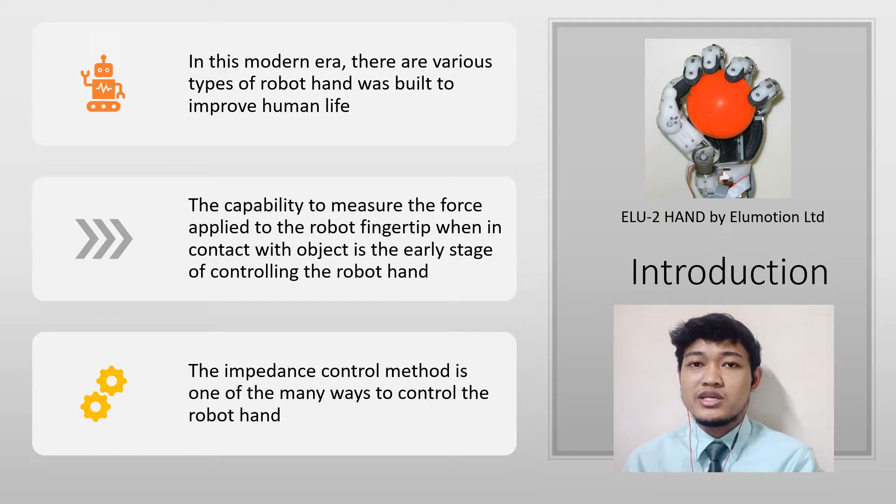Impedance control is a dynamic control approach related to force and position. It is often used in applications where the manipulator interacts with the environment, such as a robot hand, and where the relationship of force and position is concerned.

The robot hand consists of one palm and 3 fingers. It is made up of 7 degrees of freedom, whereby each joint represents 1 degree of freedom. Each joint of the finger is driven by a DC micromotor equipped with encoders. The encoders are attached to the motor to measure the rotation of the motor for position control of the robot hand joint. 6-axis force sensors were located at the fingertips of the hand for force measurement in the X, Y and Z directions.

The system architecture uses multiple PCI interfaces, which are the PCI NI 6225 and PCI Advantech. The function of these multiple PCIs is to establish the interface between the hardware and software. The analog input block of Real-Time Windows Target in Simulink on the host computer receives analog input from the force sensor. The digital input block receives the signal from the encoders, and the motor driver receives an analog signal from Simulink, both via PCI Advantech.

The position-based impedance control was developed by considering the translational impedance equation to enforce an equivalent mass-spring-dashpot behavior for the position displacement when the end effector exerts a force on the environment. From the block diagram, the impedance control starts by setting the force reference Fref to its desired value. When the robot fingertip is in contact, it will produce an external force. This external force is only taken from finger 1, because finger 1 is the main finger that controls the other fingers, as there is a short circuit between these fingers. Only the external force from finger 1 will be used in the impedance control system.

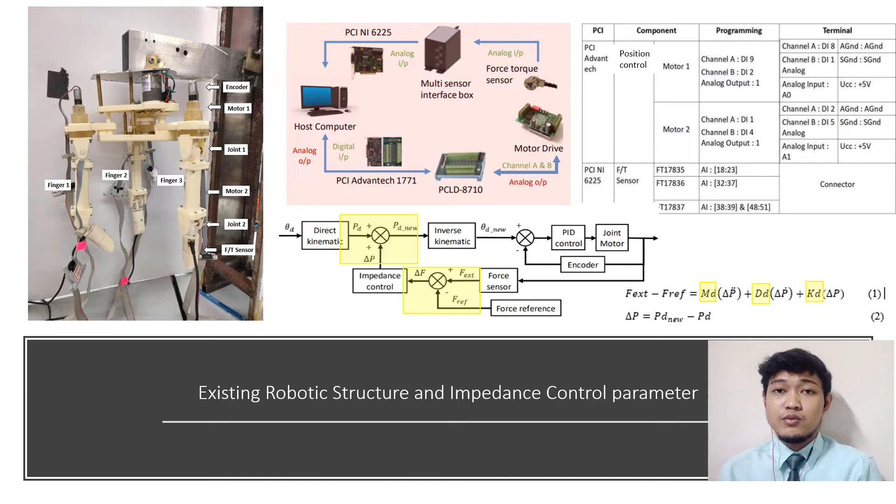When the external force exceeds the force reference, the position-based impedance control will be activated and it will modify the desired tip position PD to PD new by using impedance equations 1 and 2. MD, DD and KD are the impedance parameters known as mass, damping and stiffness parameters respectively. They can be used to produce the softness of the robot hand by changing the tip position based on the force exerted on the robot fingers. If there is no force interaction at the fingertip, PD will be equal to PD new. In order to implement impedance control, there are 3 impedance control dynamic parameters that need to be varied.

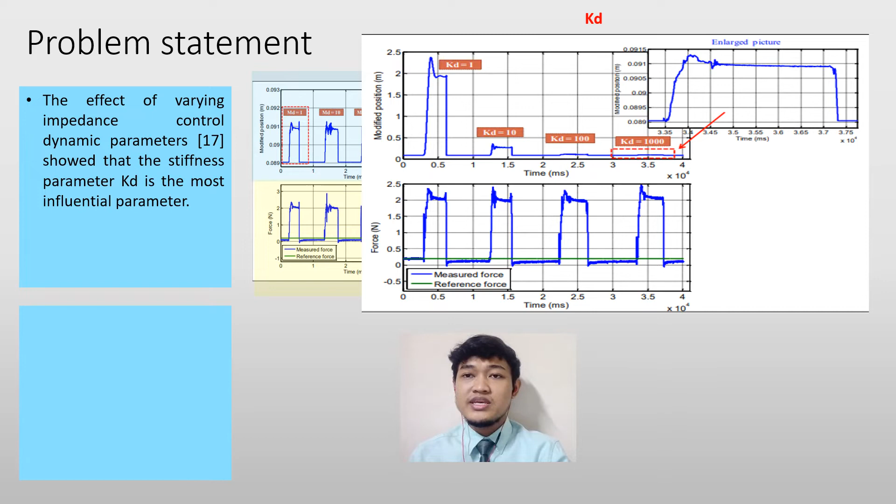From the experiment on the effect of varying impedance control dynamic parameters by Nasi, the graph below shows the force exerted on the fingertip while the graph above shows the modified position of the robot hand. Nasi concluded that MD and DD were set to 1 and 10 respectively, as the graph shows less fluctuation on the modified position. KD has shown to be the most influential parameter: when the external force exceeds the force reference, there is a significant difference in the modified position, and when KD increased by a factor of 10, the modified position becomes smaller. However, the work has not yet been done on real object grasping.

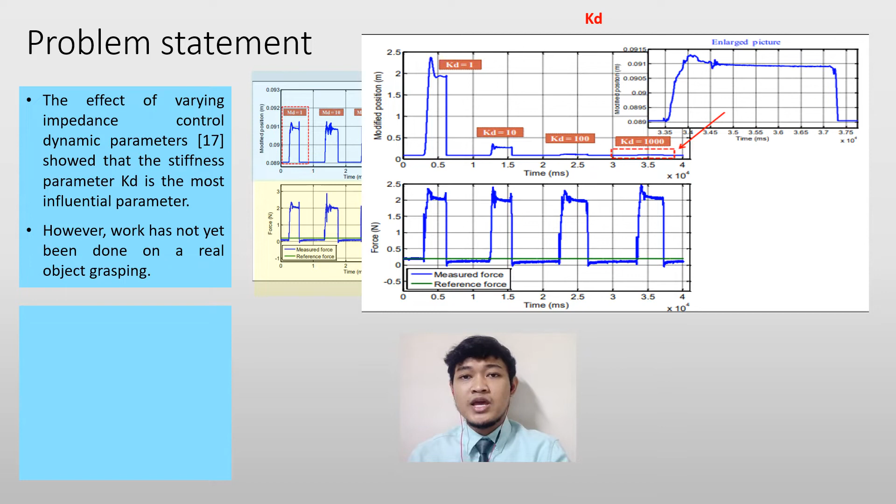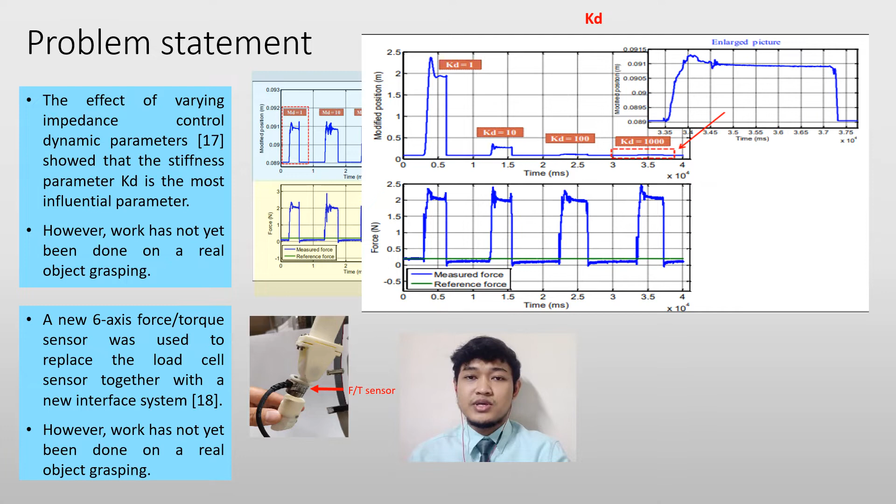In the latest study, a new 6-axis force sensor has been used to replace the load cell sensor, together with a new interface system for more accurate force measurement. However, the work has not yet been done on real object grasping. Therefore, the objective of this work is to analyze the effect of varying the impedance control stiffness parameter KD on object grasping, and the effect of grasping different object textures with the same impedance control stiffness parameter.

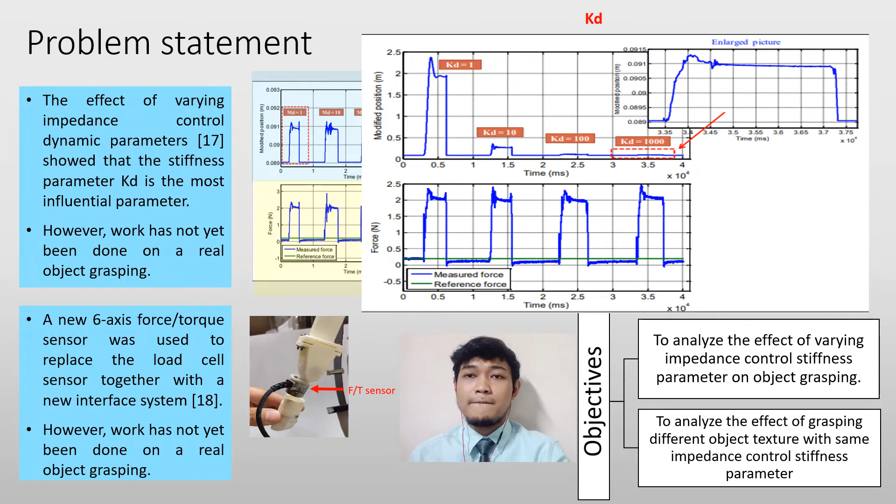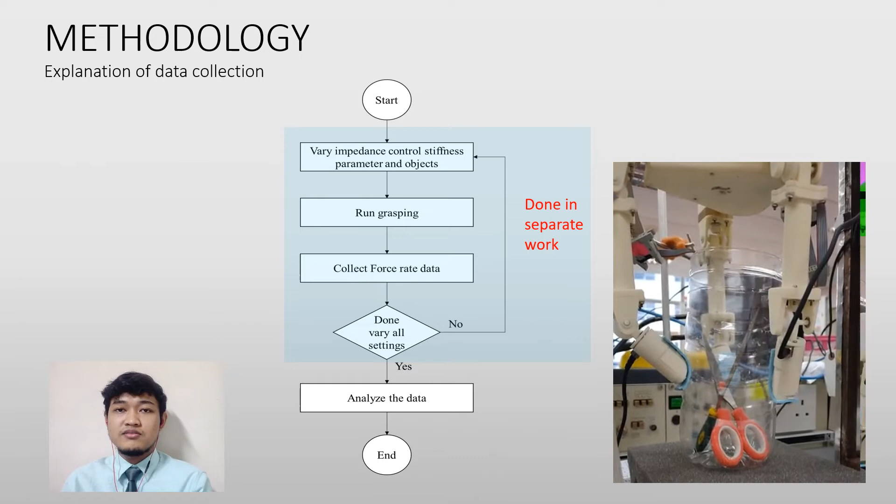This video shows how the grasping data was taken. In separate work, the 3-finger robot hand is tested for real grasping on two objects. The tested objects are a bottle and a ball, which have different textures. The bottle is hard, while the ball is very soft or spongy. It starts by varying the impedance control stiffness parameter for both the ball and the bottle. Firstly, the stiffness parameter is set to KD 1000. The force reference value Fref was set at 0.1 Newton.

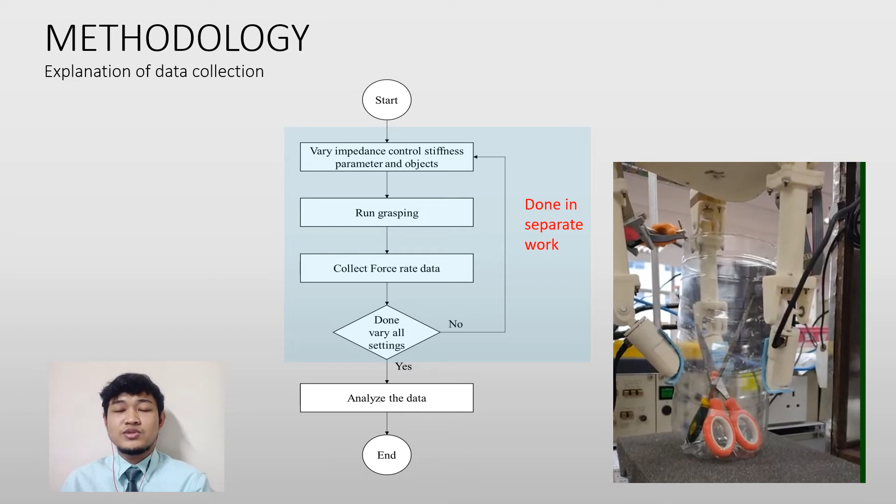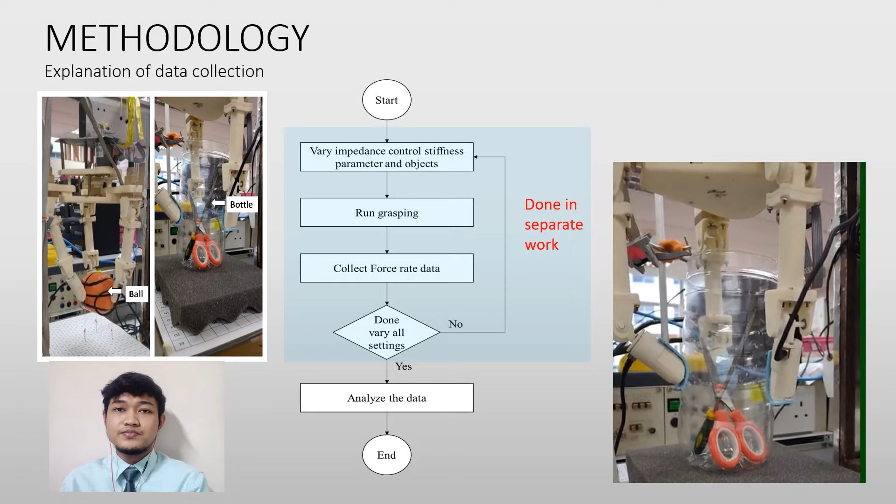The 3-fingered robot hand was tested for grasping a plastic bottle and a sponge ball as shown in the figure. The external force measured by the force torque sensor in figure 1, namely force external 0, is collected at 0.25 seconds after the fingers start to touch the object. When the grasping tightens at 1 second after the first touch, the external force, namely force external 1, is collected.

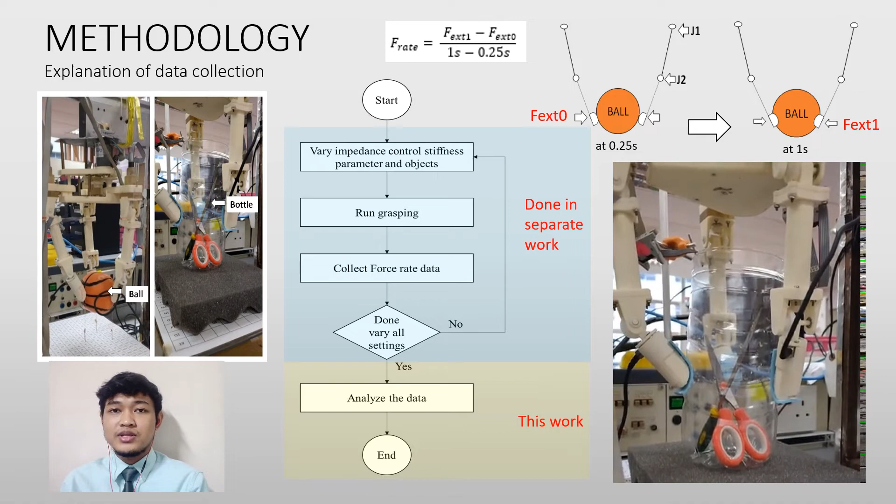Force rate data was taken by using this formula. In other words, force rate shows the intensity of the force applied to the robot fingertip when in contact with the object. The procedure was repeated 25 times for each object. After completion, a similar procedure was taken for other impedance control stiffness parameter values, which are KD 500 and KD 250. In this work, analysis of F-rate data was done to analyze the effect of varying impedance control stiffness parameter on two objects grasping.

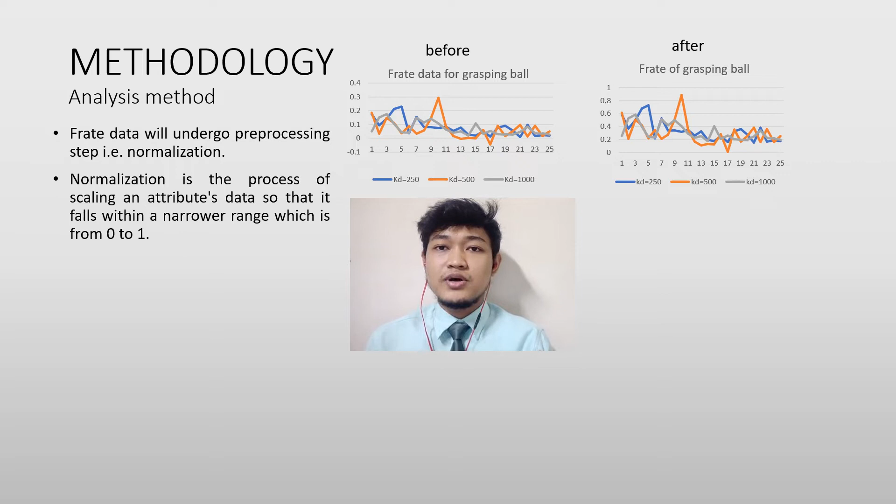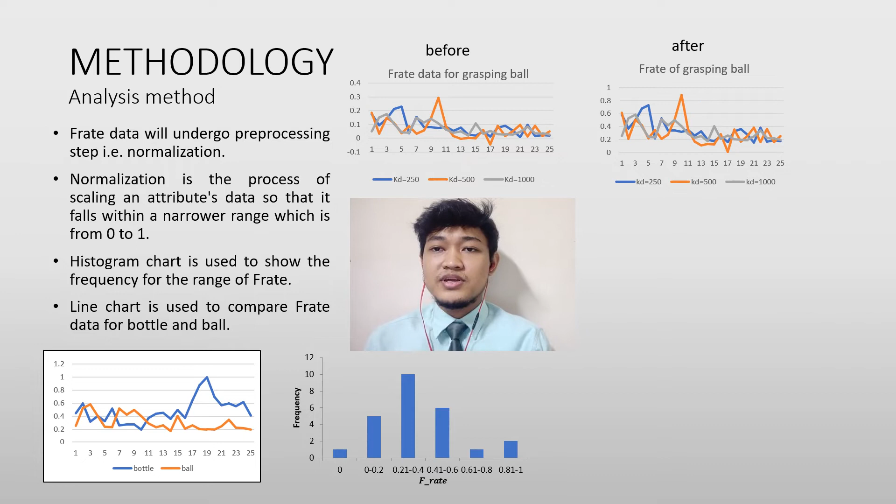The F-rate data will undergo a pre-processing step, that is, normalization. Normalization is the process of scaling attribute data so that it falls within a narrower range, which is from 0 to 1. Figure 1 shows the F-rate before and after normalization. A histogram chart has been used to show the frequency for the range of F-rate. A line chart is used to compare the F-rate data for grasping bottle and ball. All of this was done to look for the effect of varying KD on F-rate and the range of F-rate for bottle and ball.

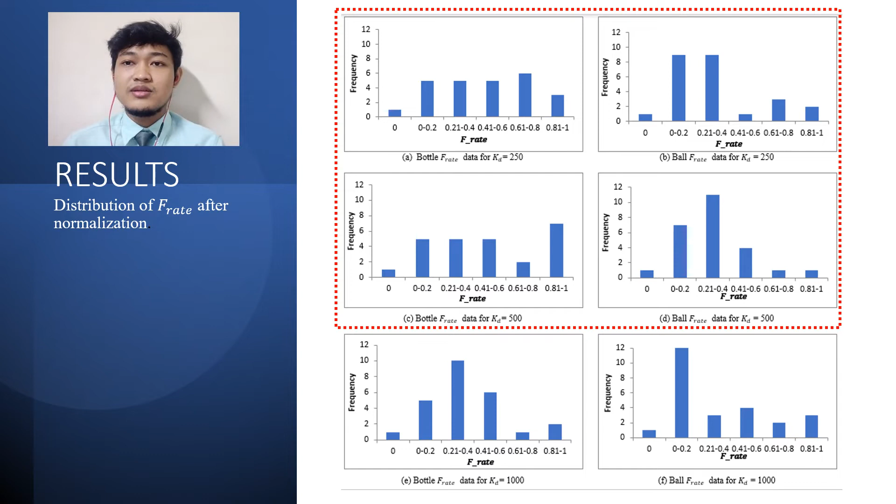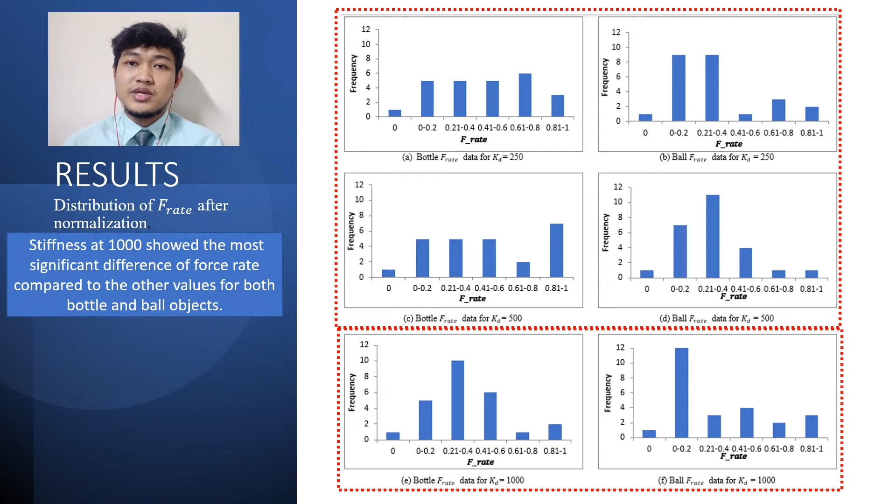This graph shows the distribution of F-rate after normalization. From the analysis, there is no pattern of data that can be seen from figure A, B, C, and D. However, the stiffness at 1000 has shown the most significant difference of force rate for both object grasping. Besides, at the same stiffness, the force rate data are most frequent in the range of 0 to 0.2 for ball, compared to 0.2 to 0.4 for bottle. Thus, it can be concluded that the grasping force rate for bottle is higher than a ball.

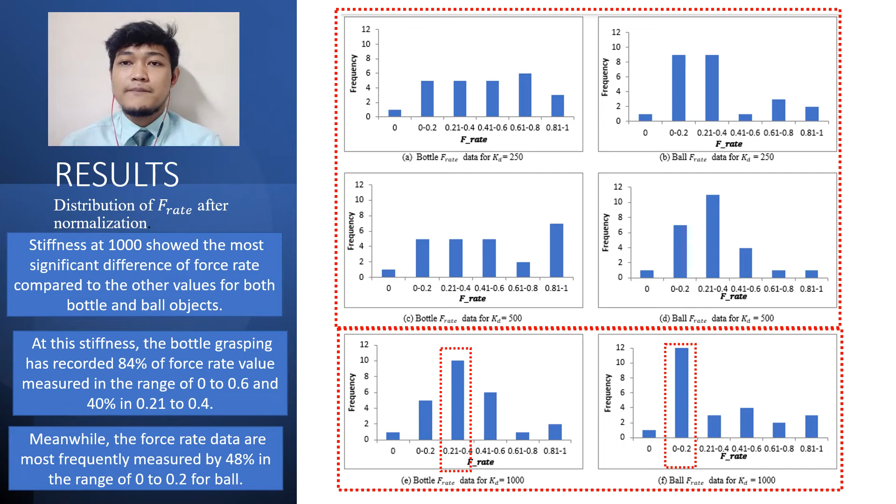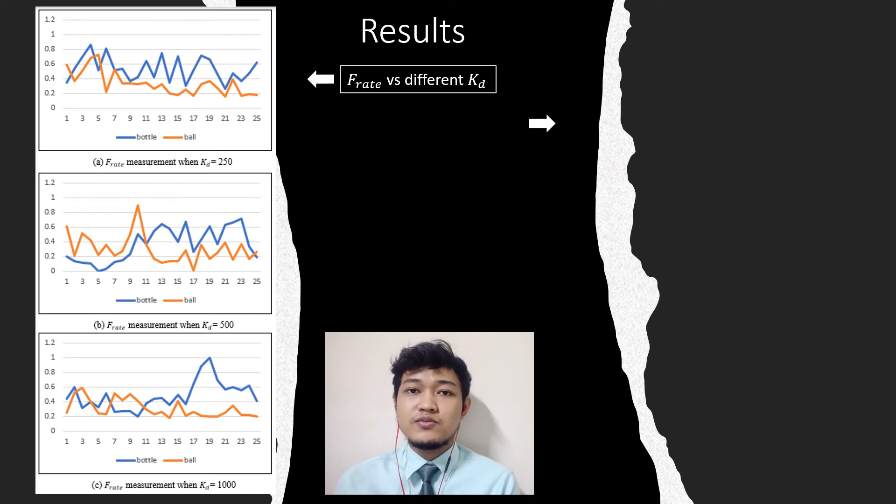The figure on the left shows the force rate measurement of grasping for different KD. Based on this figure, it also shows the same result as the previous histogram graph, where the F-rate of grasping bottle is higher than grasping ball for every varied KD. However, the measured value is sometimes not precise because there was backlash. This backlash was due to inaccurate measurement of the sensor as there is small position error occurring on the gear of the robot hand.

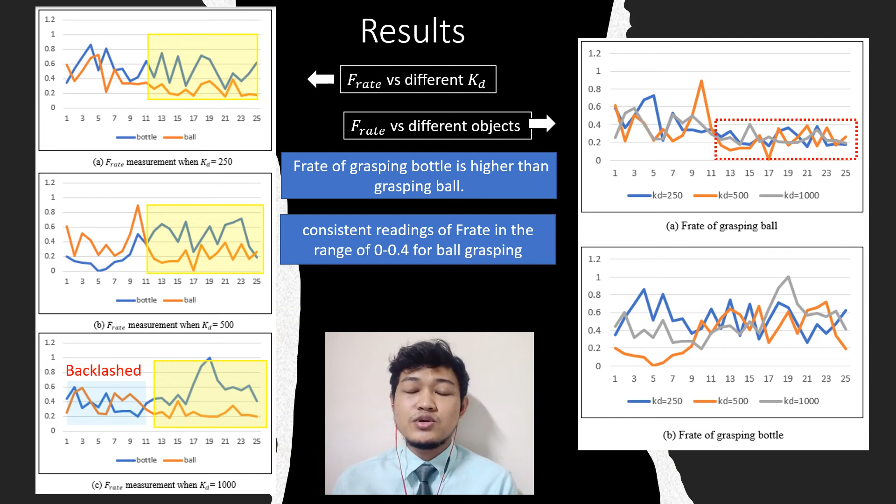This figure shows the force rate measurement of grasping for different object texture. The result shows consistent reading of force rate in the range of 0 to 0.4 for ball grasping after 11 data. This indicates that when the connection between the hardware components changed after 11 experiments, the effect of the negative factor from the friction between gears, bearing, and connector shaft on the force measurement started to reduce. But it is different for data when the robot hand is grasping a bottle. There are no patterns shown from the graph. However, we can conclude that the average force rate is in the range of 0.2 to 0.7. As a recommendation, more grasping data is required in order to analyze the effect of force rate on the object texture.

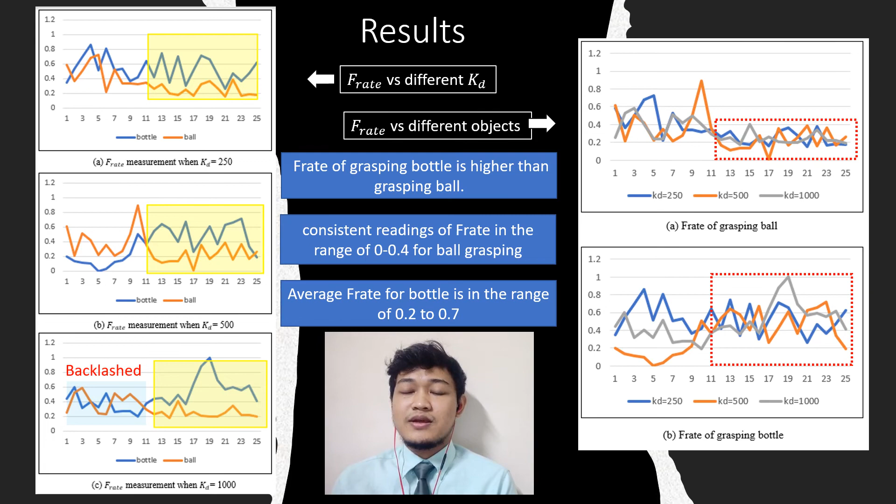For a conclusion, an intelligent robot hand needs to adjust the stiffness of the joints by determining the suitable stiffness parameter value by itself. Prior to this, the effect of varying impedance stiffness parameter KD on the measured force when grasping objects with different texture has been observed in this work. KD 1000 showed the most significant difference of force rate for the two objects compared to other stiffness values.

At the same time, the force rate data are mostly measured in the range of 0 to 0.2 for ball compared to the higher range of 0.21 to 0.4 for water bottle, by 48% and 40% of the total number of experiments respectively. From the most frequent range of the force rate, the average value for bottle is found higher than the ball. The analysis results show that the force rate is a feasible parameter for developing an intelligent object recognition method in the future.